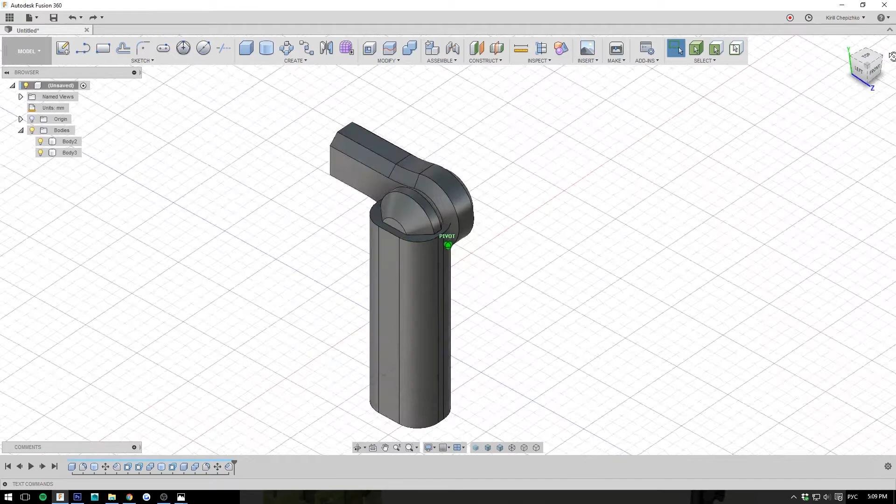Before we proceed to the rifle demo, I also wanted to explain the importance of components, the assembly, and basically testing your joints. I'm only going to lightly touch on the topic because it's not as important, but nevertheless it's good to know.

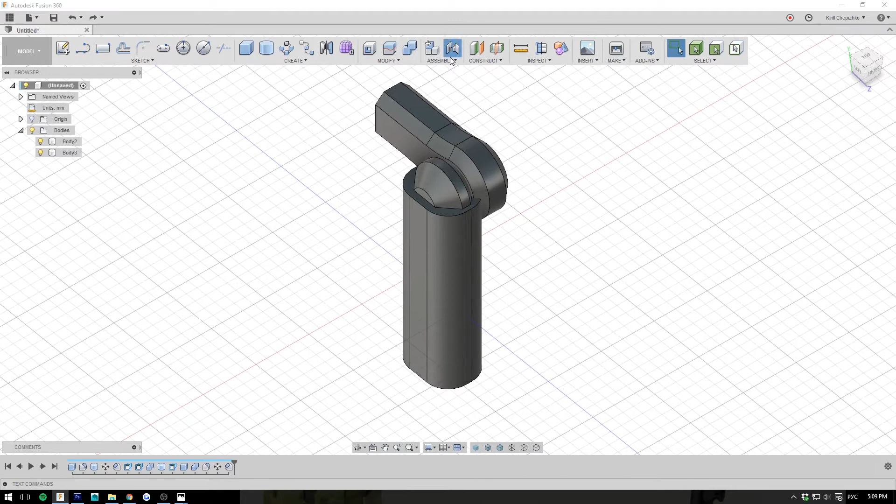So in order to do any animation testing or movement testing, whenever you need to test your design and functionality, it's good to use the joint system in Fusion 360. It's in the Assemble tab right here. I'm going to explain the as-built joint and the regular joint options, and then you can definitely feel free to explore the rest on your own. It's not as complex as you think.

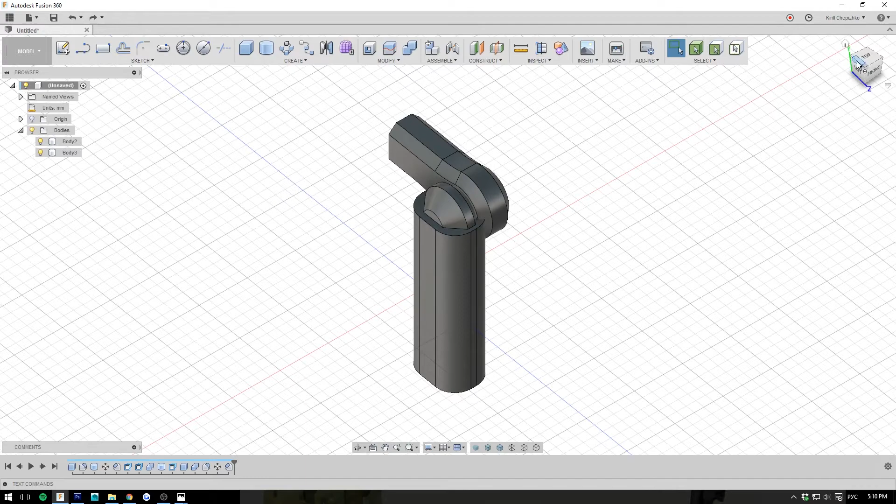Basically, in order to start this, you need to define your components. Components, you can think of them as the modules that I was mentioning previously - parts that make sense together.

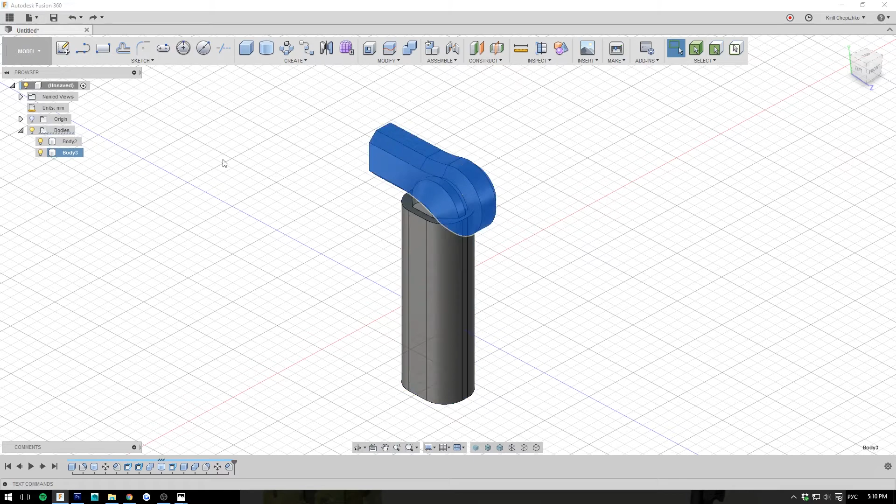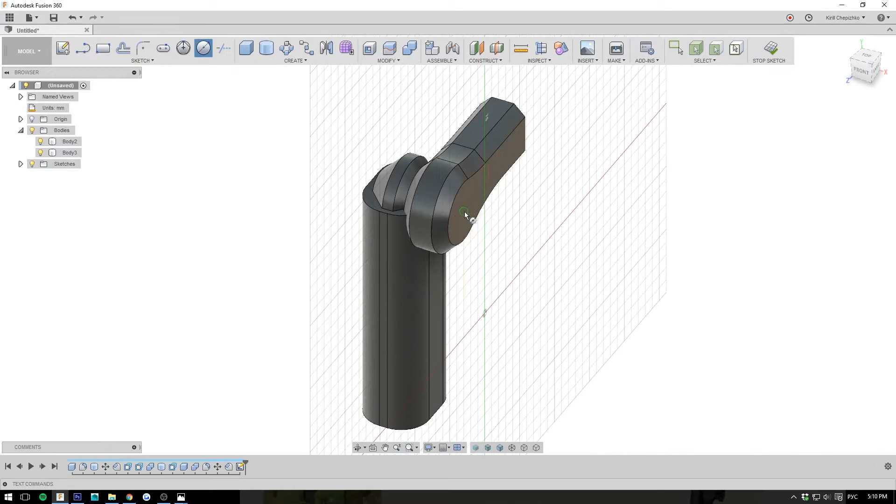For example, this body right here is going to be our component 1, and this body right here is going to be our component number 2, and I want component number 2 to be rotating around this part - this will be our center of action. We're actually just going to add a cylinder to define that joint, because in reality you would need to be building that joint using something else. They cannot just be next to each other and then they won't be able to rotate.

Just going to keep it here, we're not going to cut it. Just to exaggerate, this is what it's going to be like. And then, of course...

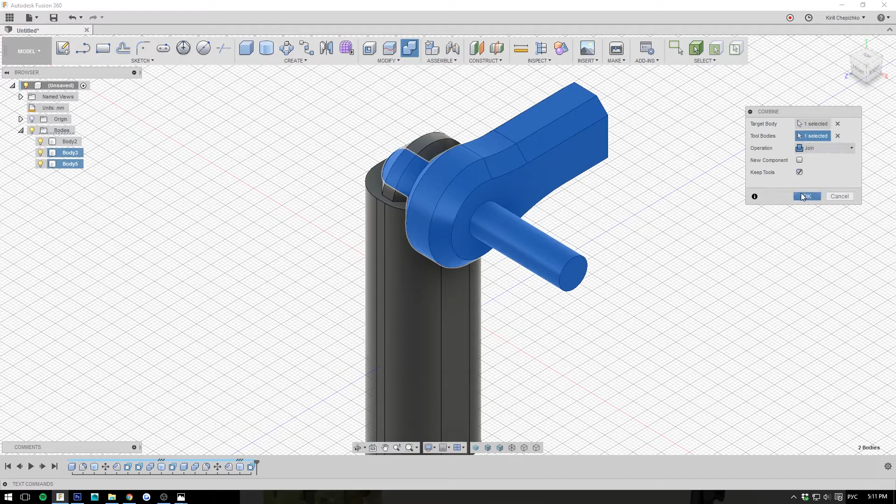Just like I was mentioning before, complexity only where it's needed. In terms of making this magic happen, you don't really have to make the opening right here like this - so like if I hide body number 5...

It connected - hold on, let's go back. Let's redo the cylinder one more time.

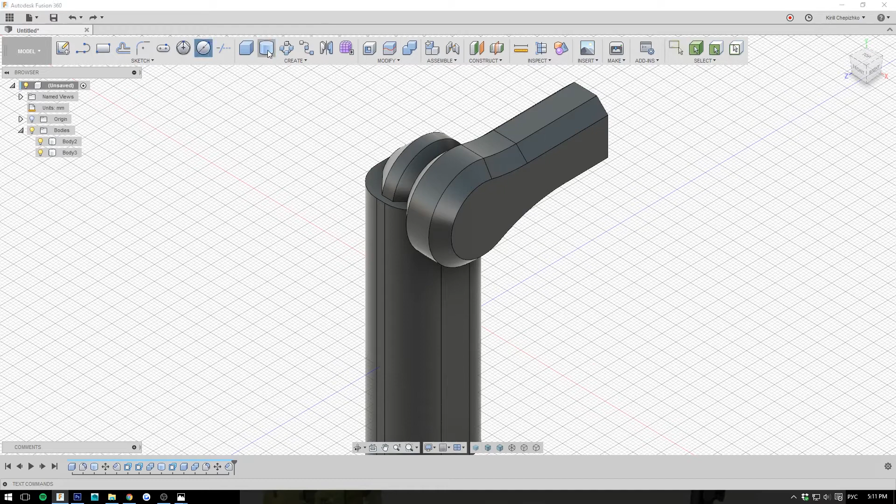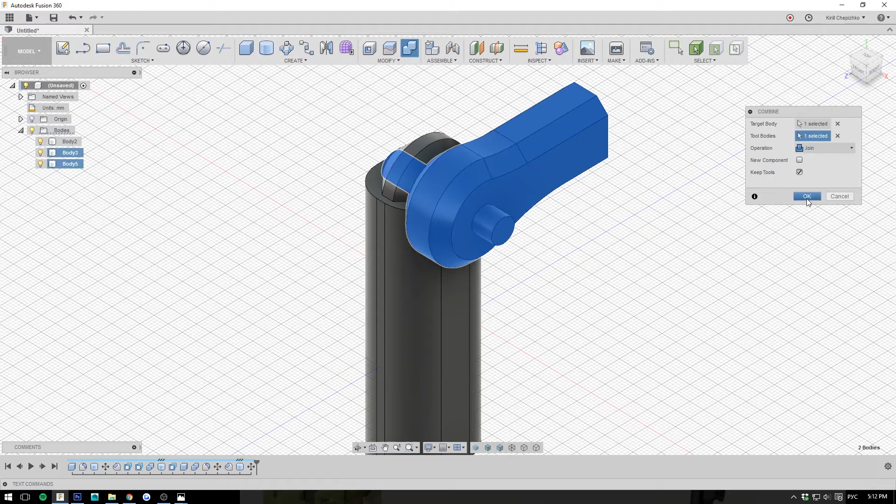So as I'm building this cylinder, I'm not going to join it, I'll move it in. This is going to be the center of our rotation. So in order for this to rotate, we don't have to actually make the opening - this part doesn't have to have the cut.

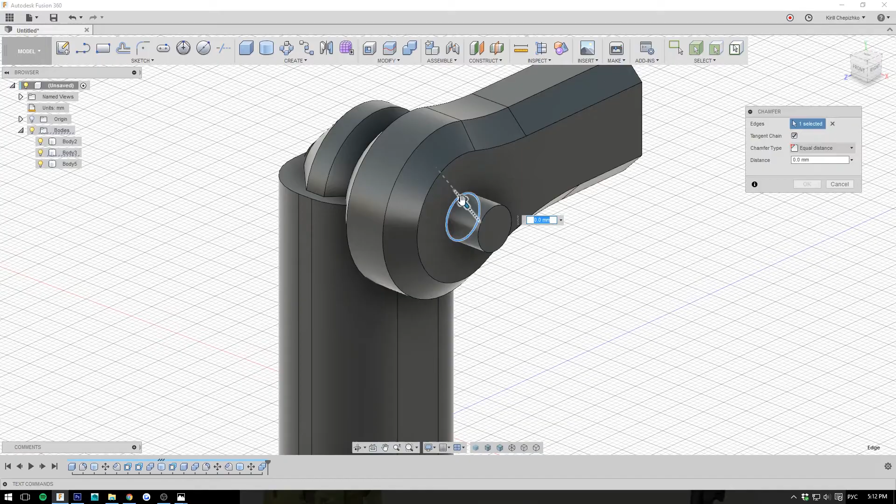So if we hide it, we don't need this opening at all - that's just extra geometry. You will never be able to see it unless you're going for something like this, where it needs to be very obvious that this is how the parts are connecting. In that case, yes, maybe it makes sense - even then, maybe not all the way through, because for concept, you're going to be retopologizing it later.

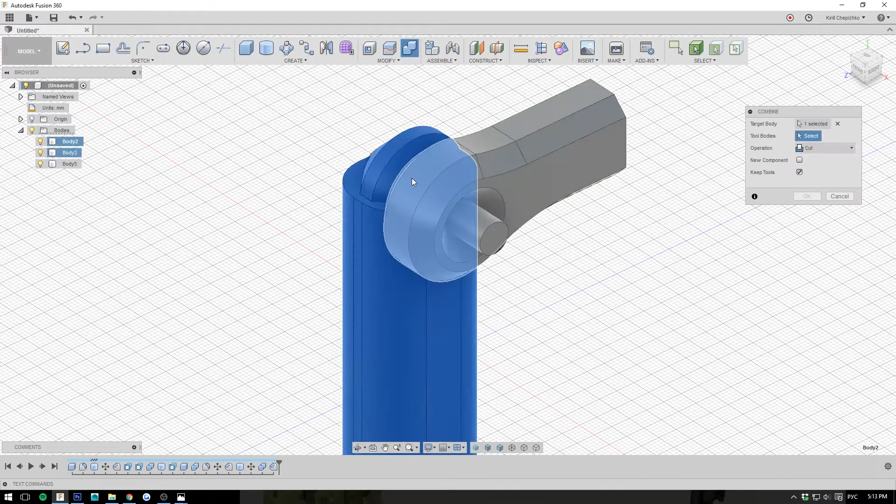It doesn't matter. But anyway, what we're going to do is we're going to take this body and this one, and we're going to merge it together, and this is going to belong to one component like this.

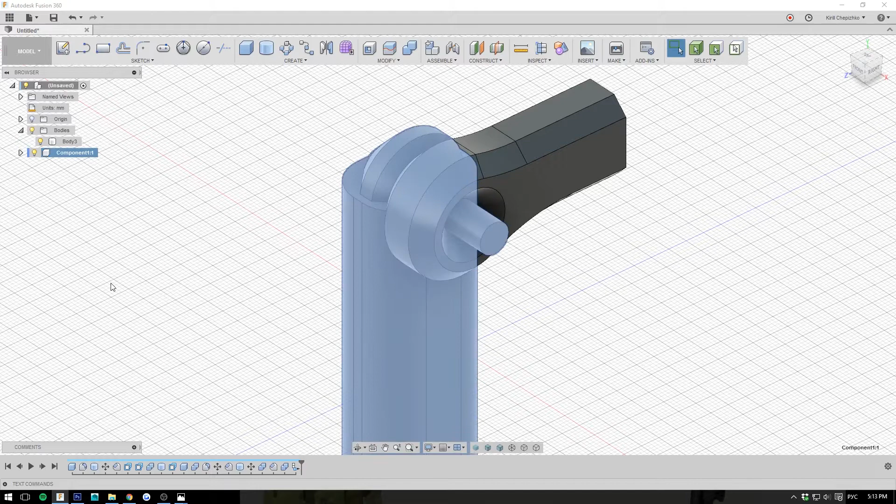And what we need - you can think of components as technically just folders. We're going to take this body, right click, create component from bodies, and now this is a component, and then create component from the other body. So we have 2 components now.

A little trick to make it more clear visually: in the inspect section, go to component color cycling toggle, and this way you will have every component at a different color.

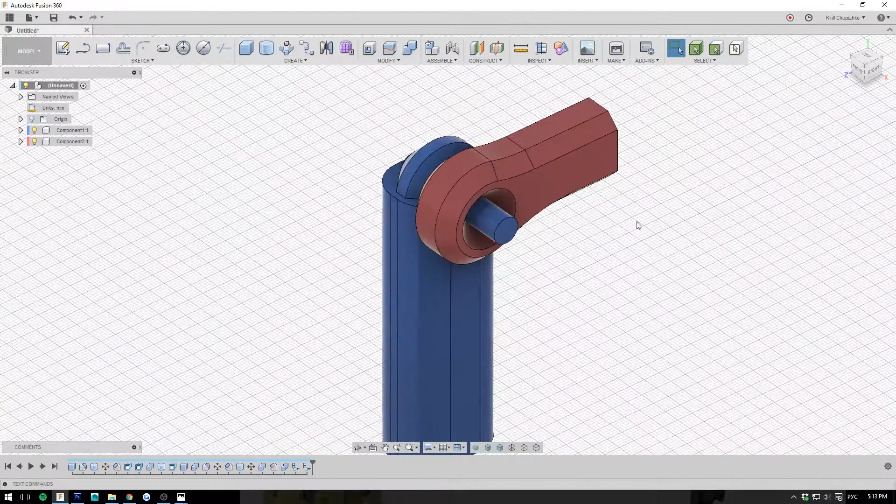One neat little trick with components is that one of the reasons why you would want a component is you can right click it, save a copy as, and it's going to create a separate file in your Fusion folder.

So let's say you built the whole rifle, and then you just take all the bodies that belong to the scope, drop them into the separate component, and then you can save that scope separately and reuse it.

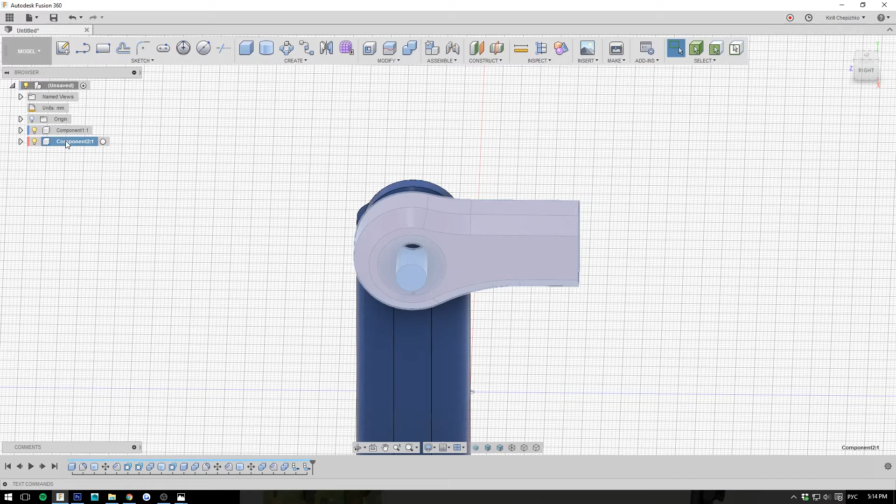It's super convenient. So now that we have two components, we can go into the assemble tab and try to create a joint. The first type of joint is going to be the as-built joint, meaning it's already in place - we already built it the way it's supposed to connect.

So we're going to pick - this is component number 1, this is component number 2. It just jiggled to show that we chose the rigid type. We actually need the revolute type.

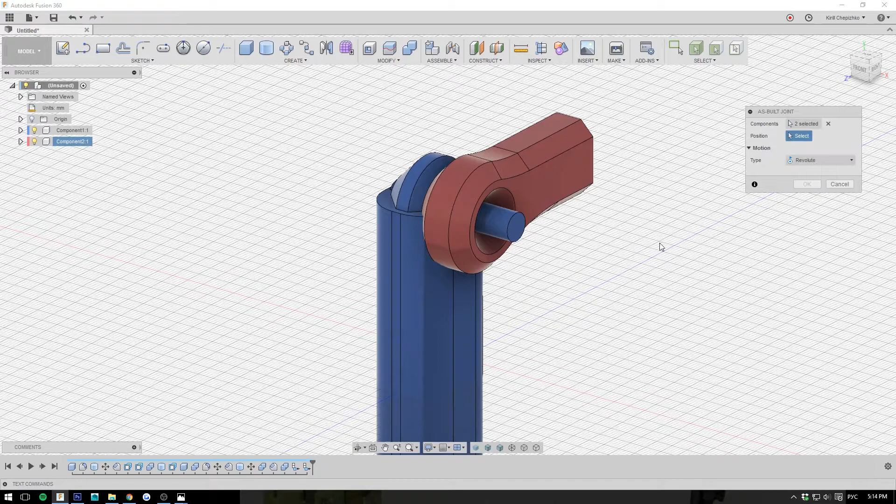And we will need to define the center of rotation. This is why we need that cylinder. We technically didn't need it, because even if we don't have the cylinder, if this is like a cylindrical joint, you will be able to find the center of rotation without it, but this is just a lot easier.

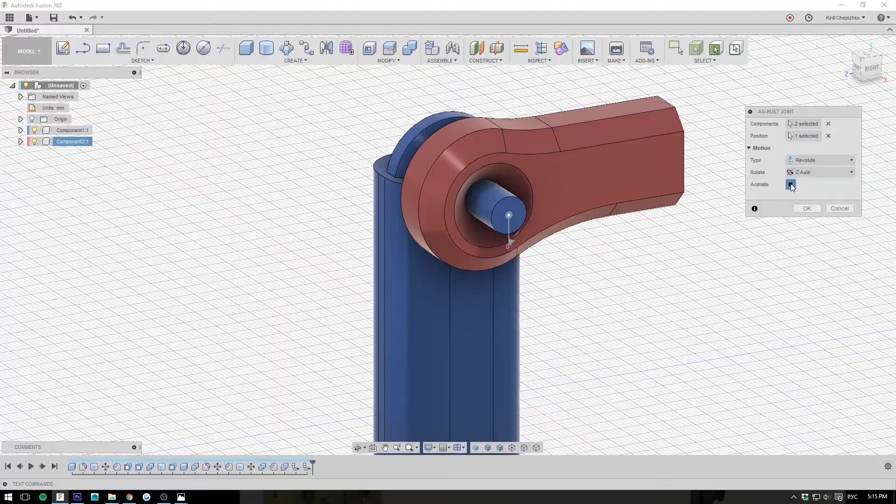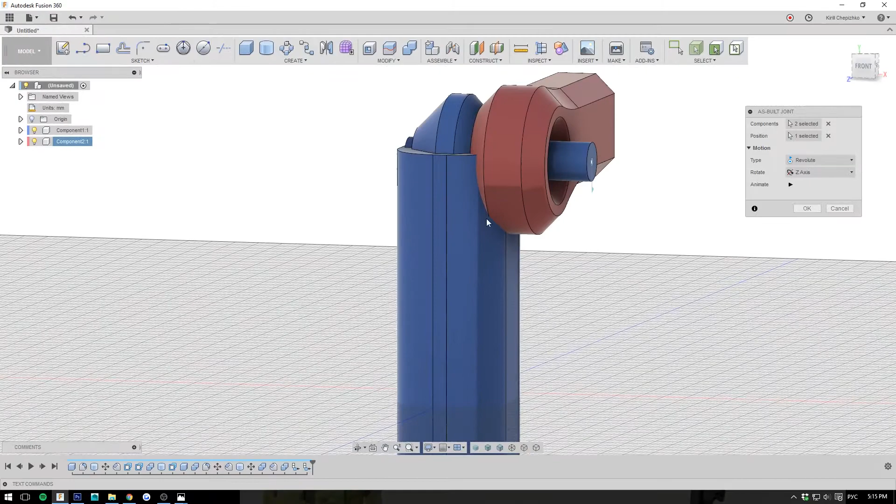So I just clicked it and it started rotating because it's previewing the animation right here. And this is literally the part where this is why we need this animation. You can see that the red part is intersecting with the blue. And this layer of believability that we add would be to make it look like it's not actually intersecting, it's not crossing. So how do we do that?

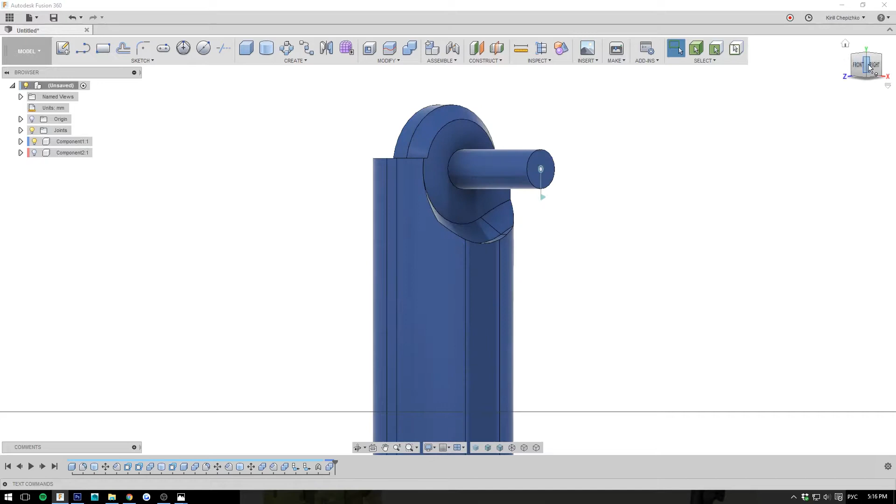Well, first of all, we're gonna do a combine, and this body and this body, we're gonna make a cut, keep the tools, and say okay. So now when we hide the red component, you can see that we created this cut that accommodates, this is like a new design feature, right? Something that you didn't think about before. Now that we have it, we know it's needed.

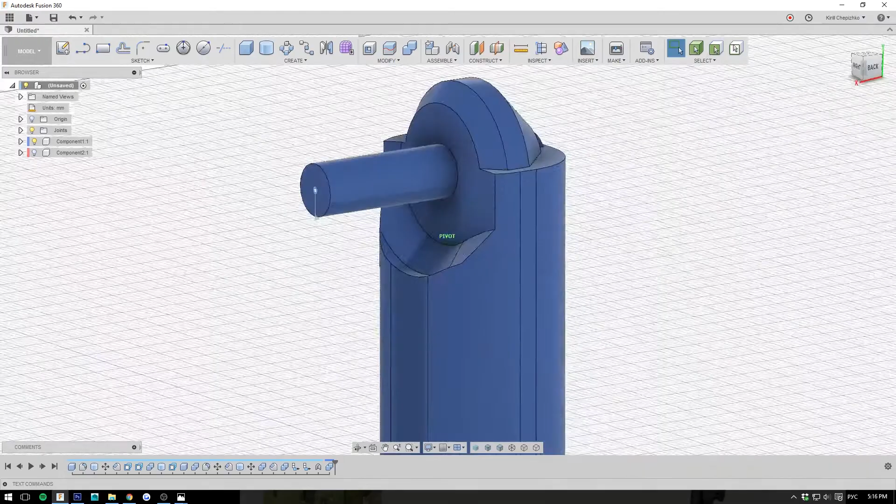This is why a lot of parts, like mechanical parts, engineering parts, look the way they look, because they are required to have a certain shape. But as you can tell, this only accommodates for the rigid joint, for the position. So in order to fully sell the idea, we will need to rotate this red part.

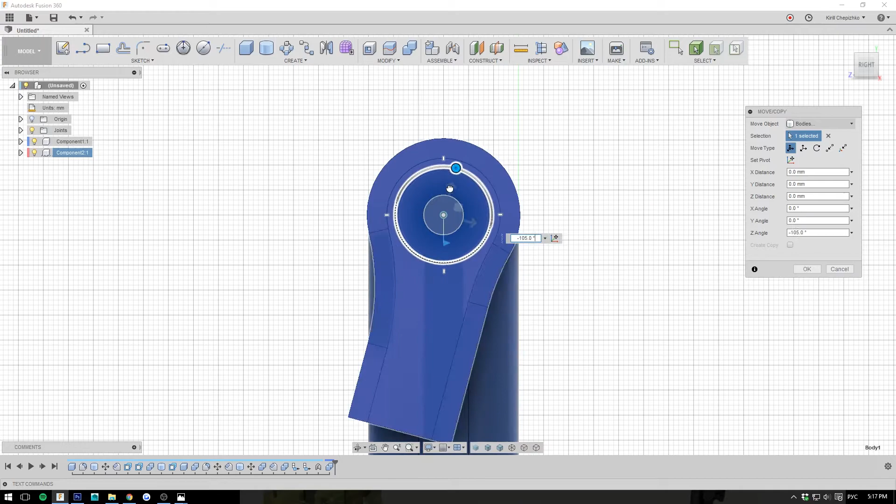We're going to set the pivot to the center, and look at the way, let's reduce real quick, look at the way the red part is traveling. It's making this movement. So we will need to get rid of all of that.

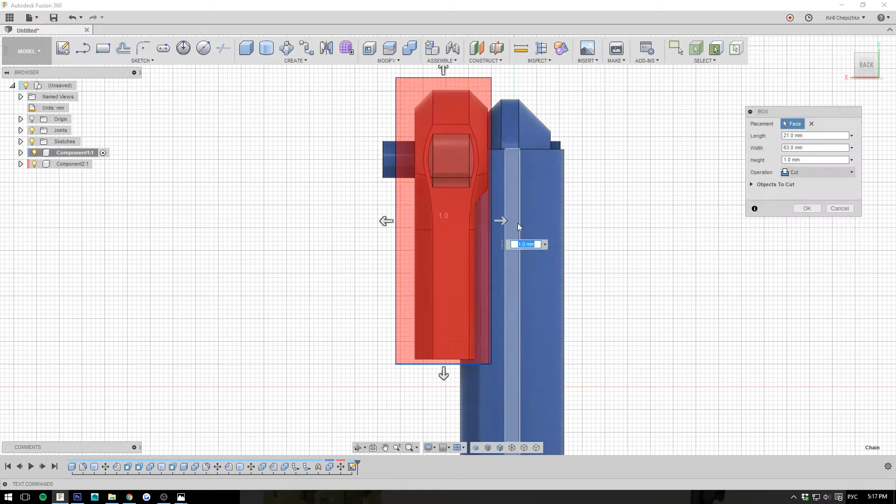And the easiest way is to just make a cut, keeping in mind some of the tolerances. So maybe about this far, just give it a little bit of a tolerance. Just use it as a new body. Make sure it goes past everything that we need to cut, and then make the cut. Don't need to keep the tools.

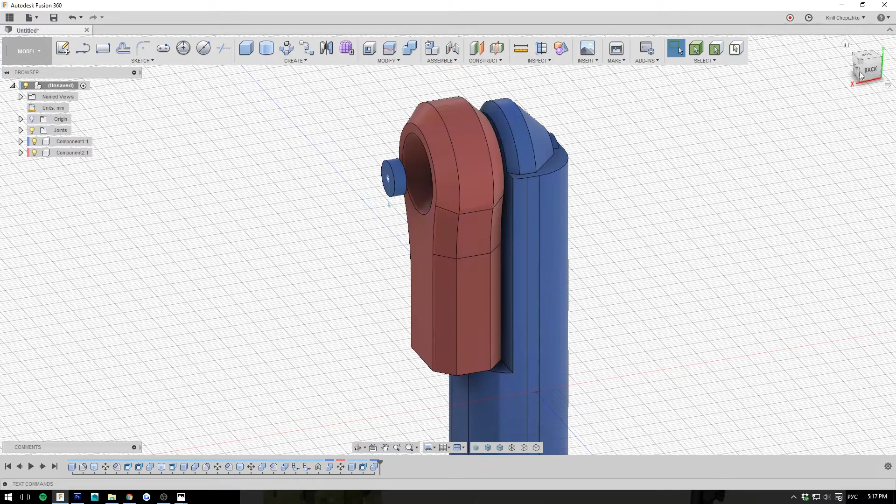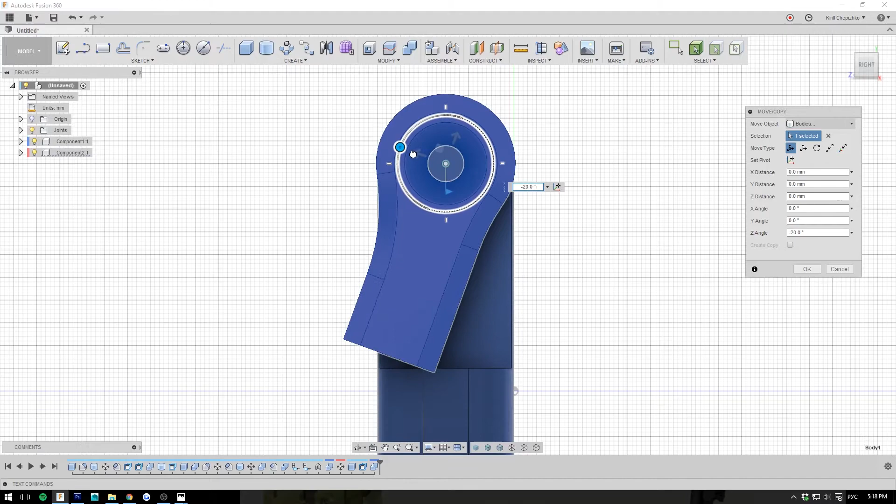So now that, and that's not even enough, because I'm predicting that the red part is going to start moving. Well, it's barely doing okay. You can see that at a certain angle, it's still touching the very bottom end, so we're gonna have to adjust it and move it down to accommodate for that swing. And somewhere here is gonna be just enough.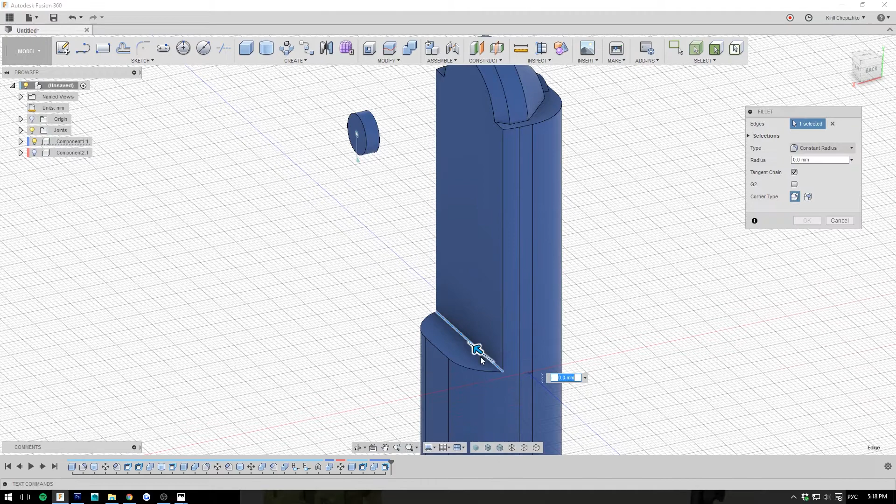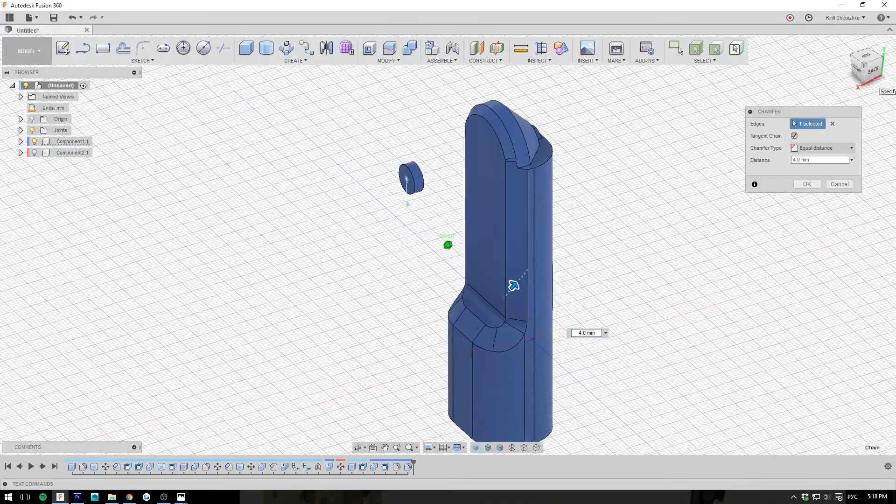And then we're gonna hide the red part and just make the design look or read better. Make it look like it's actually been, people been thinking about it, not just making a cut. Something like that will do. And this is how our part now has this very specific, unique look, because it accommodates for that movement, including that tolerance. We'll probably need to bring this back.

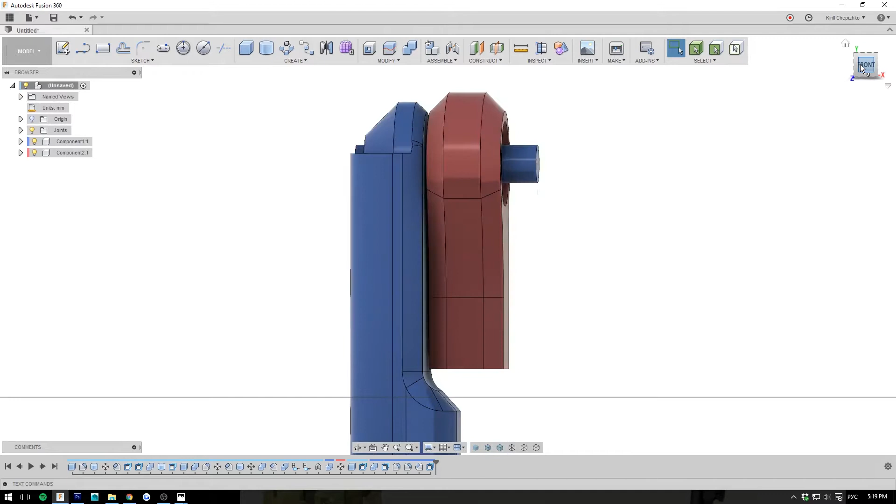And now we're going to go back to as built joint because we can clearly see that it's going to rotate and it's not going to interfere with anything. But a lot of times you want to build that separately somewhere else.

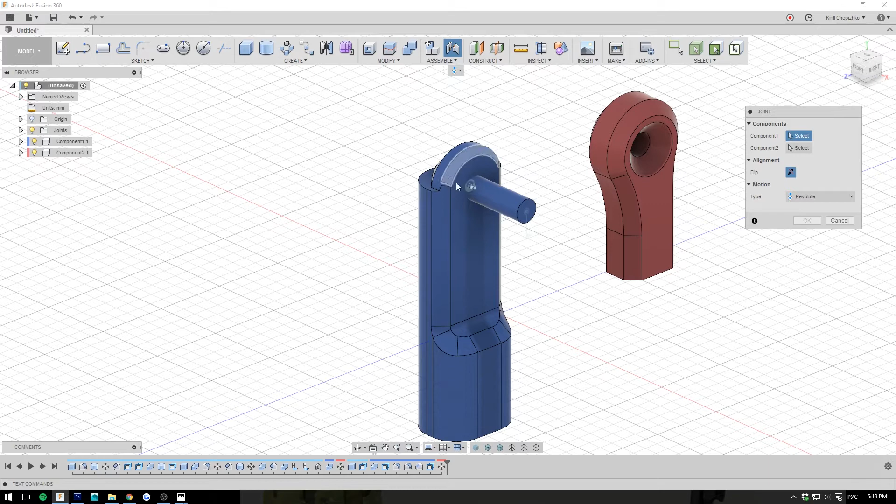So for example, you can build this red part on the side like this, and then build this. It rarely makes sense because it's easier to do an as built joint. But as an example, you do the regular joint. You're gonna point first to the component right here. Then the next component is this one. You basically want to put the flag in the center of that rotation, in the center of that joint.

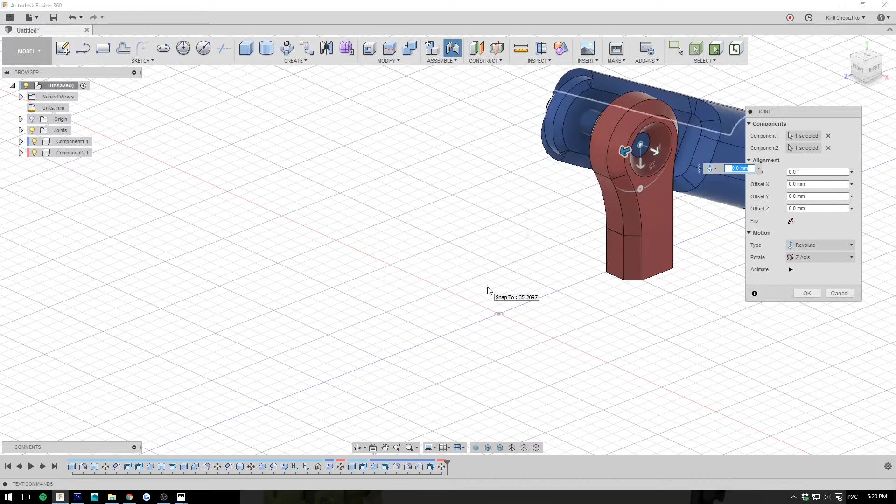It doesn't have to be rotation. It can be rigid, like this. We already have a joint, so you can see that this is how it connected. Let's do it the other way around. Let's start with the other part. This is going to be 1. This is going to be 2. There you go.

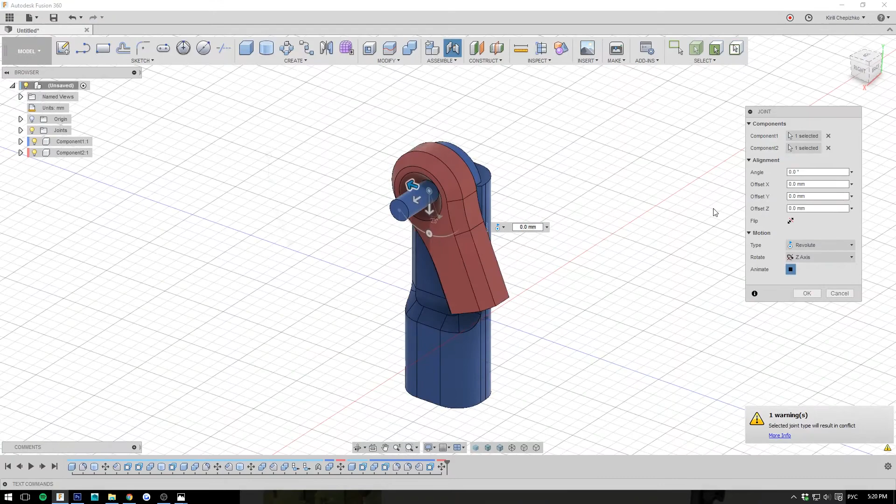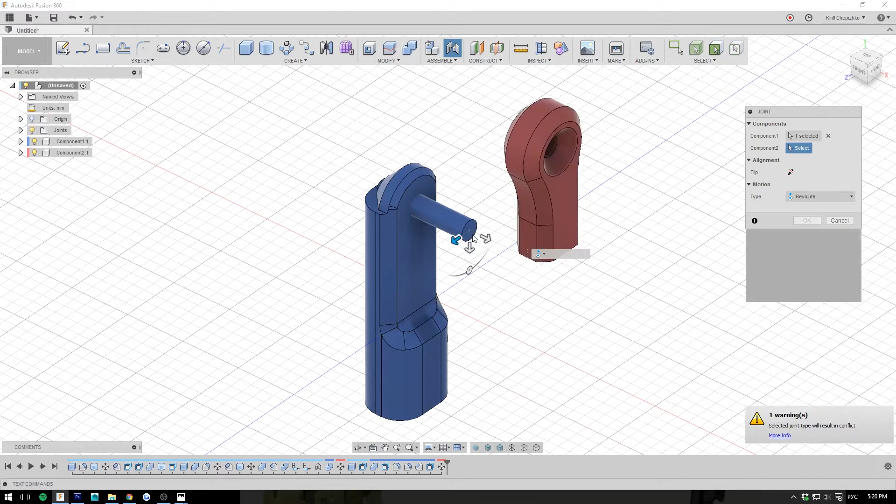Beautiful. We can play the animation, and we know that this is working, well, too close. Let's move this component. Let's stop it, and the second component needs to go probably here. It cannot be here, right?

Because it's intersecting again. So this is our original as built with a slightly more tolerance. Play it back. Great. We have a working mechanism now.

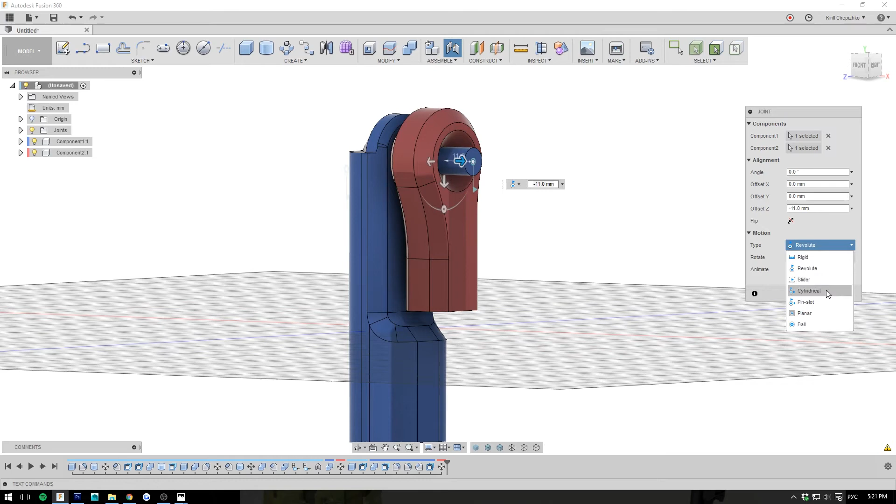And obviously there are lots of types of joints: rigid, revolute, slider, cylindrical, pin slot, planar, ball joint. You're welcome to explore them, but this is the basics of how joints work, and this is exactly how you test your design and function. Just as far as joints go.

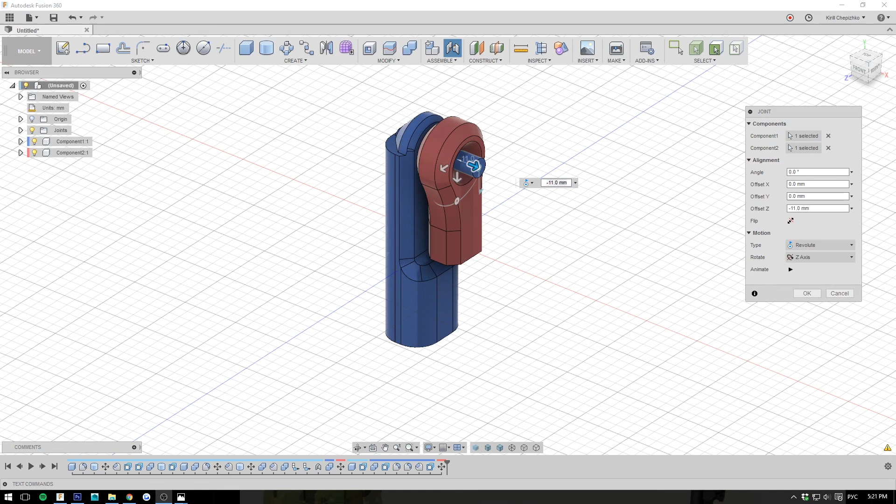So we're gonna go ahead for the next chapter and model the rifle.